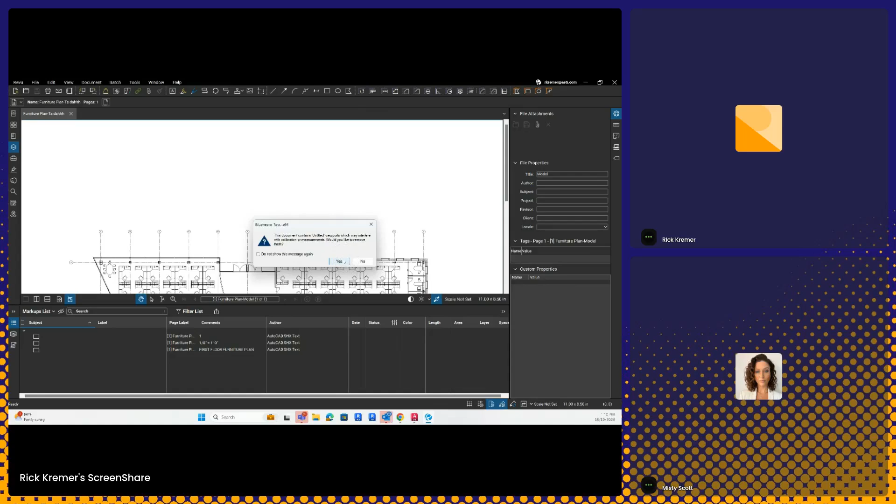So there's a couple things about troubleshooting with AutoCAD drawings. First of all, it has viewports it doesn't know what to do with, so go ahead and hit yes to get rid of those viewports. So let's focus on layers.

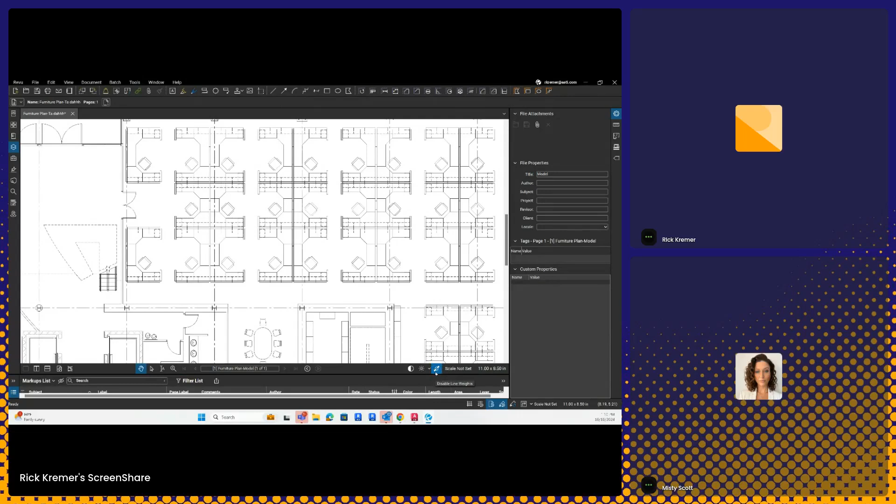First and foremost, Bluebeam will display the plotted line weights. In the display properties, we can select this off, and you can see what it looks like using that CTB from AutoCAD. I always work with line weights off, and that's how most people work in AutoCAD as well as Revit. I'll turn on disable line weights—by the way, anything that's blue means it's enabled. What I mean by layers is if we go over here to layers on the left-hand side, look at this—you see all the layers? This is something that comes out of AutoCAD.

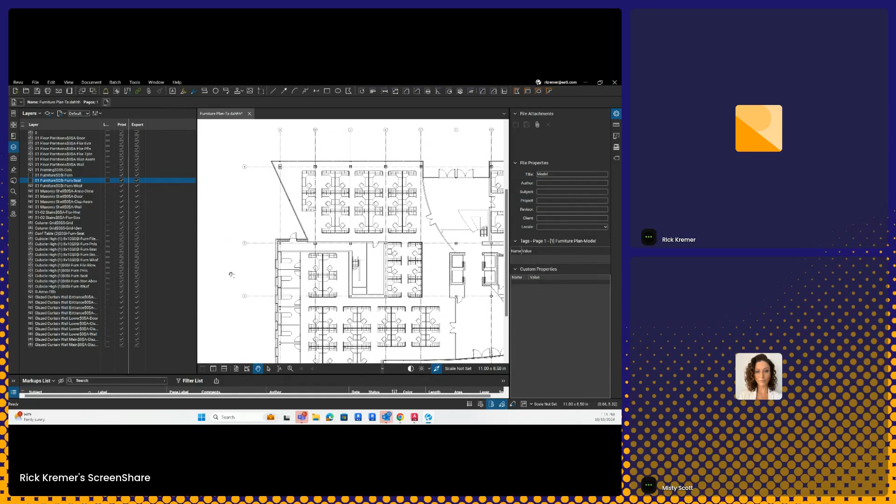If you use the Bluebeam Revu add-in, it puts it all on one layer, which is nothing. Here, I can start to go through and turn off my furniture. You see things turning off in these cubicles? It is pretty darn cool. So I can start to turn off the floor partitions, turn off these furnitures, these cubicles right here, and little by little clean up that PDF the way that I need it to be. How cool is that, right?

When we take a look at Bluebeam again, this is the information I really want to look at, the core and shell. So now at this point, there's nothing I need to do. I can minimize this and basically begin to work.

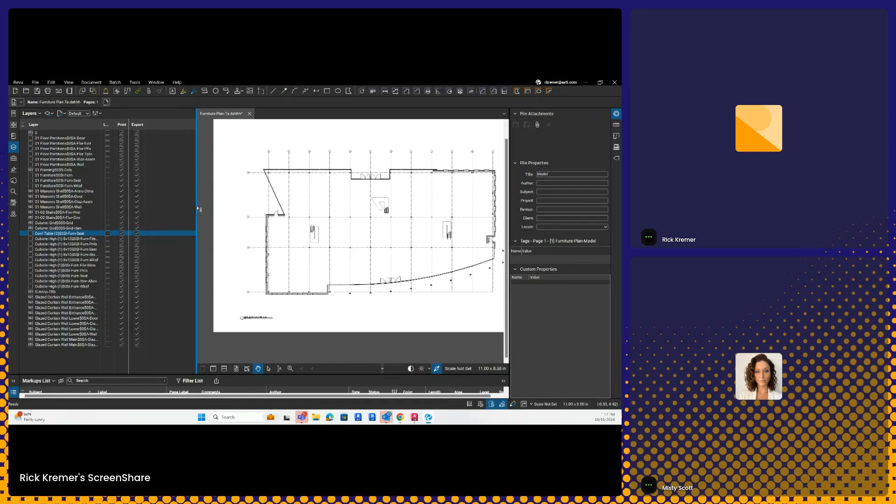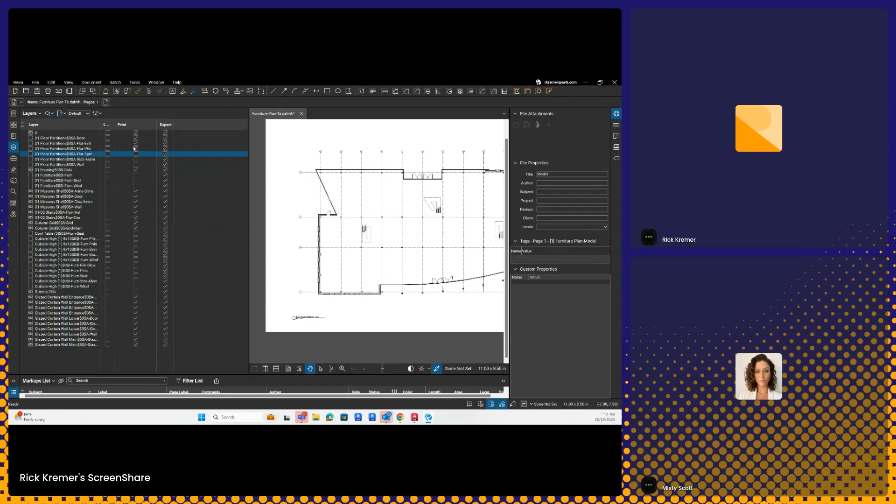The other thing we can do, which is really helpful, is just in case they are turned on here in layer information, is things that can be printed, right? So all of these, I don't want them to print at any point in the future. I'm going to select them all and uncheck these right here so that they do not print. Boom, boom, boom, boom, boom. Right, and the same thing over here on these guys. So this is just like in AutoCAD where we have things that plot and don't plot. So that's really one of the major takeaways, using layers.

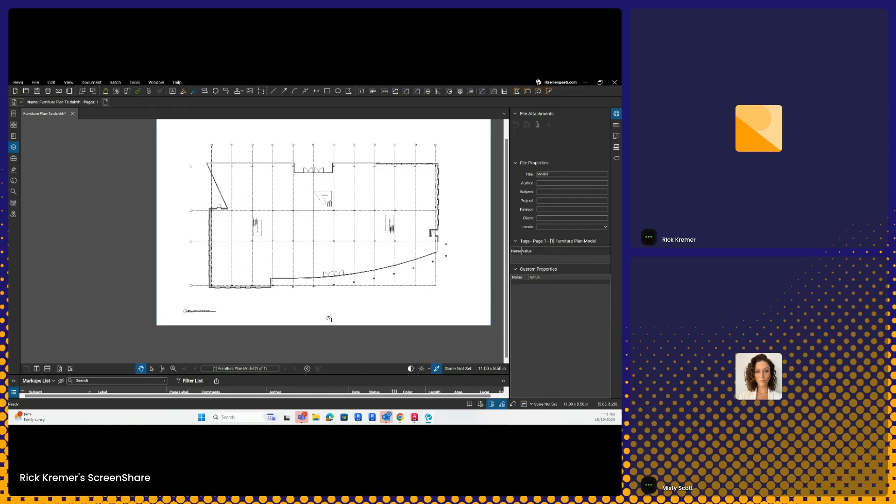Now let's say for argument's sake you're like, Rick, we don't have anything in layers. It comes from Revit, right? And in Revit we don't have layers because Revit rocks. When we get a drawing in as a PDF from a consultant using, let's say, a third-party application to print, or it comes from that AutoCAD application, a lot of times when you first get a drawing you're going to get a bunch of layers over here on the markups list. If you don't see the markups list, select this to turn it on. This is a little hamburger icon to show layers. But let's take a look at this real quick.

So folks, when you first get a drawing, open up your markups list. If you have a bunch of SHX fonts...

Over here we have all these SHX fonts. To get rid of them, easy peasy, folks. Over here, go to Document and Flatten. Again, why do we do this? It's because as we start to develop our markups, we don't need these in the way. And quite frankly, what they end up doing is, let's just say, they make the file a little bit more corruptible, right? It can start to give you issues when it has information that Bluebeam doesn't know what to do with. So how do we get rid of it?

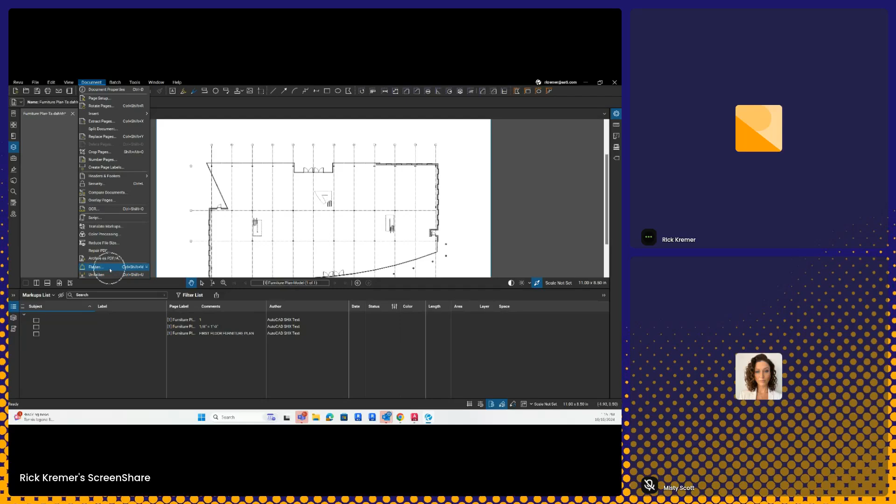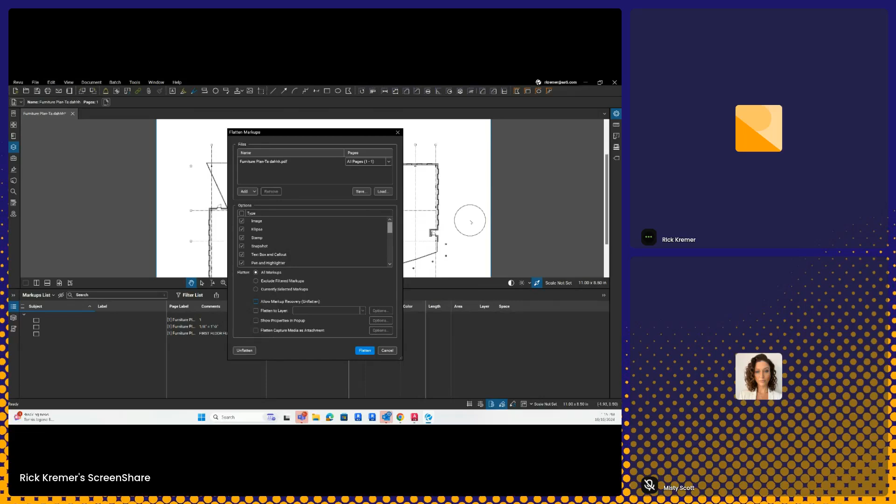You can't delete it, but we can flatten it. Check it out right over here under Document, select Flatten. What you want to do is select everything here in the options dialog box, okay, and uncheck allow markup. This feature allows you to flatten a document and then later unflatten it if you want. That's a whole other discussion, but over here what I want to do is get rid of it altogether, so I'm going to flatten it. It basically squishes it into the white piece of paper here. So I'm going to check this, clear it, click flatten, boom. Guess what? My markups list is now clear and ready to roll. How cool is that? Whoop, whoop.

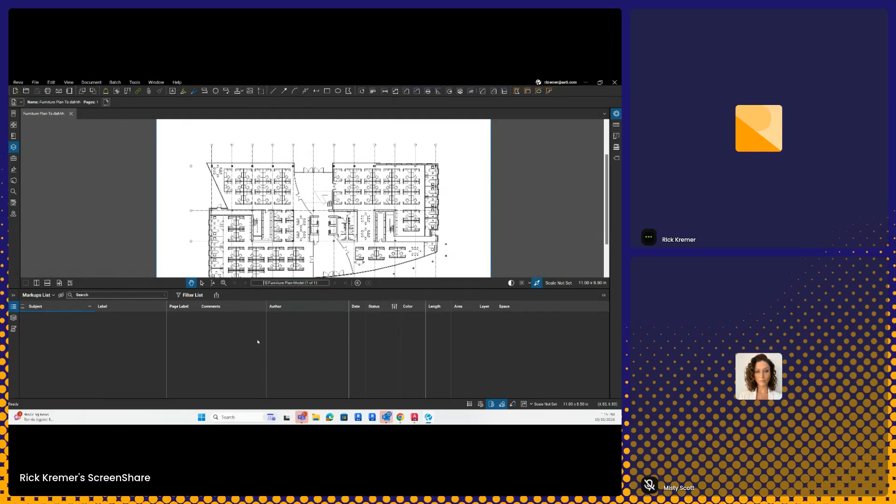So now go ahead and save it. So now I've saved that file. My layers are still intact, right? Flatten does not get rid of layers, it just puts the information in the markups and embeds it inside. And that's exactly what I want. So now the next step to get my PDF ready for consumption is find out what the scale is, right? So over here, this is at 1/8 of an inch. Well, remember, I did a plot to scale, pretty much zoom to fit.

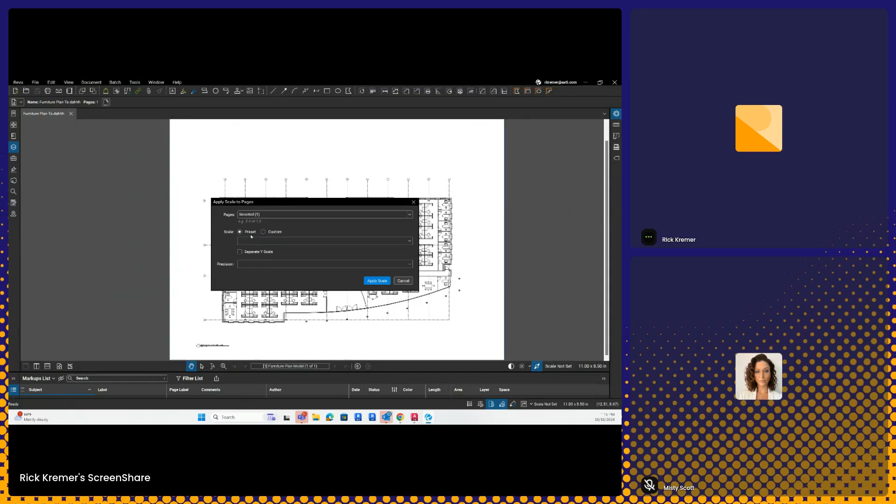So this might not be at 1/8 of an inch. A lot of people will set the scale according to this, but let's see what happens. If I'm doing linear or area calculations, it's imperative to have the correct scale. A lot of people just get lazy and say, yeah, it says 1/8, I'm going to set the scale at 1/8 and round it up to a full inch. And I think I'm off to the races and I'm good to go, right?

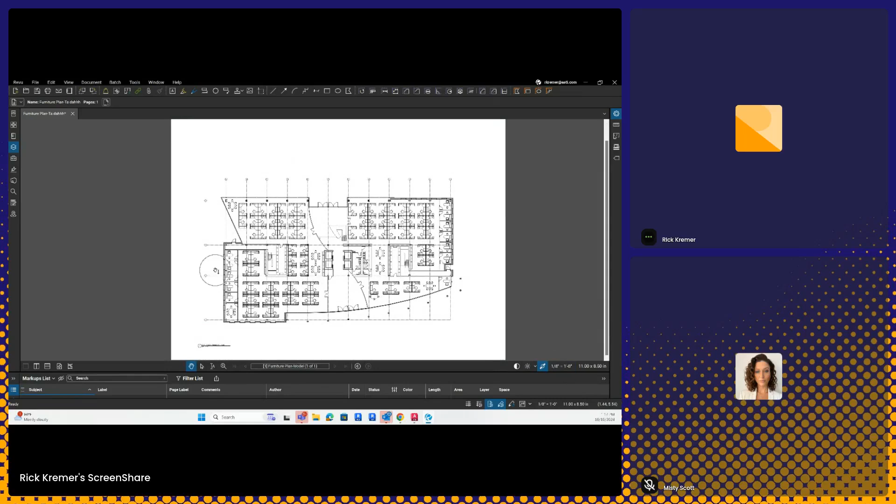But did the person who sent this to me actually print it to scale? This says it's at 1/8. Well, let's do a quick dimension check. Unfortunately, there's no dimensions here. Let's see if there's a dimension layer. Wah, wah, wah. There's not.

So what do we do? Let's take a look at this drawing more carefully. If we look at a typical door, all your doors are always going to be 3 feet. For the most part, all typical doors are 3-foot openings. So let's do a quick test.

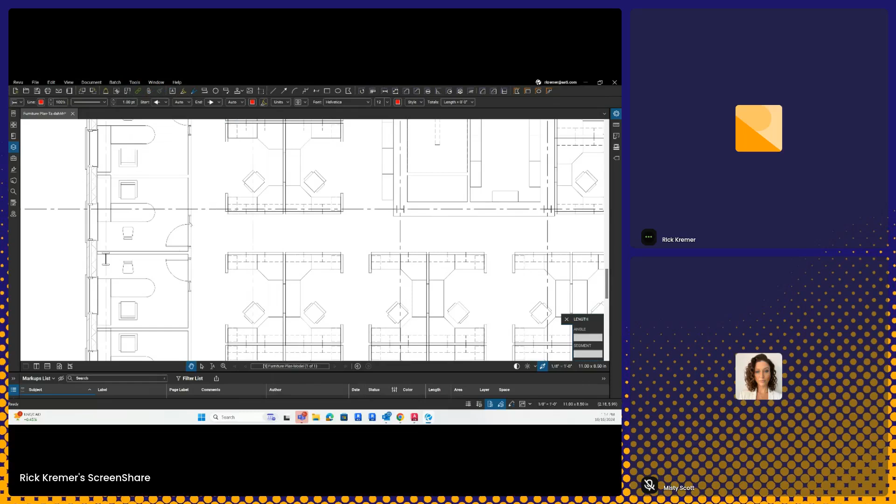I'm going to go to Tools, Measure, Length. If this is the first time you're doing this, measure length is just like dim linear in AutoCAD or a regular dimension in Revit. This is point A to point B. So I'm going to do length, and come over here, zoom in on this door, and go from here to here. Oh folks, look at that. 10 inches. You know it's not 10 inches, it's 3 feet.

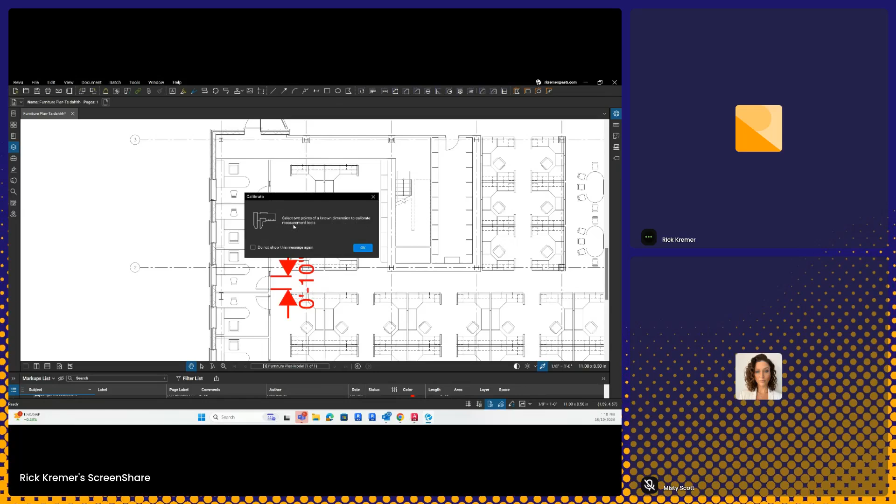So what do we do? We fix it. Let's go back to Tools, Measure, and Set the Scale. Clearly it's not 1/8 inch, so what I do all the time, no matter what drawing I get, is custom scale and calibrate. This gives me an opportunity to pick 2 points on my PDF that represent the distance. I'll click calibrate, and it gives me this dialog box. It says pick 2 points of a known dimension to calibrate the measurement of this drawing, and you can set calibration for 1 sheet or multiple sheets at one time. This just happens to be 1 sheet.

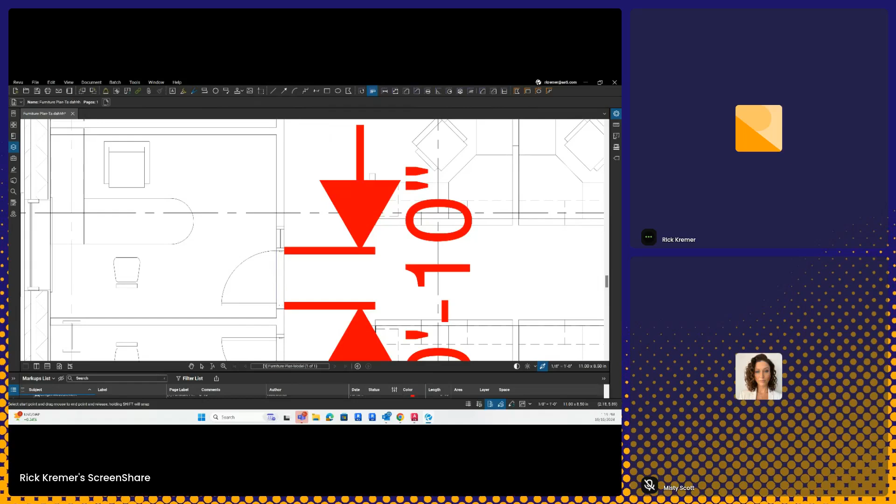I'm going to select OK, and automatically it's going to ask what area we're dimensioning. I'm going to pick that same door, go from here—and by the way, another quick tip, hold Shift and it goes straight—all the way to this point. That highlighted area represents the dimension area. That's 3 feet. Precision again, round it up to a full inch, apply scale, and now we're cooking with gas. 3 feet. Let's do another dimension real quick.

I'm going to go to Tools, Measure, Length. Let's get another doorway right over here, from here to here. 3 feet. We're good. So now when I start doing area calculations, everything is going to be accurate. So if I do an area calculation and say, what's the area of this one right here? It's 282 square feet.

By the way, if this is too big, just change the scale. Over here, I'm going to change it much smaller, maybe down to 6 points so it's nice and small. Give it a nice fill color. What's the problem with this? You can't see through it. No worries—over here in the top properties toolbar, change it to highlight. Now it becomes highlightable. Pretty cool. I'm going to make that even smaller. That's really, really tiny.

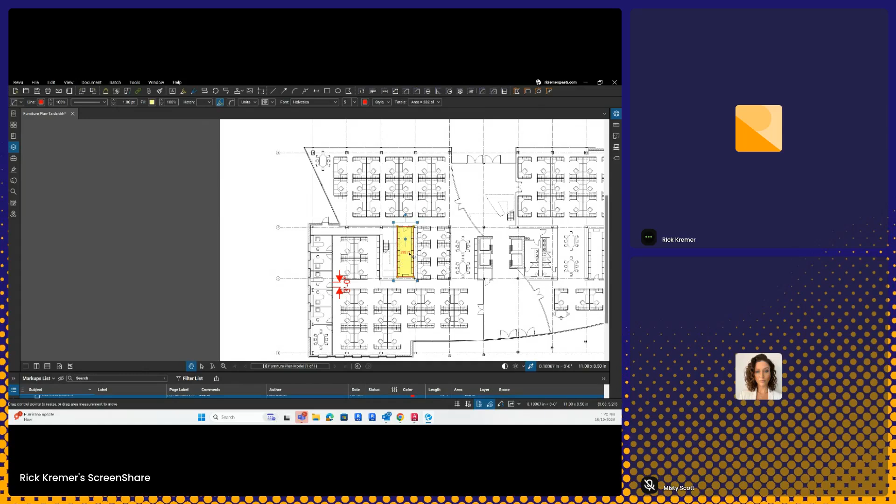So that, in essence, is what we need to do. And if I want this to be the default—I haven't even talked about creating specific area measurements, subject related—but if I want this to be the standard I'm going to use, I select my markup, right click, and set as default. This is kind of an easy way to set up your markups for default use, like always wanting them to come in yellow. Give it a new name, change the properties as you like, and set as default.

Now, when I go over here to Tools, Measure Area, I want to measure this right here. It's 863 square feet. And there's my total square footage so far. If I'm looking at, say, carpet for that particular one, I can start to go through and change this over here to CPT1. And this one right here is also CPT1.

We want this to be a default, setting up my PDF for success. I'm going to start to utilize my tool chest. My tool chest has all these different tools. I have this area here called My Tools, which is really nice, and I can apply these over here to My Tools. Add to tool chest, My Tools, and there they are. Here's a nice little shortcut, by the way.

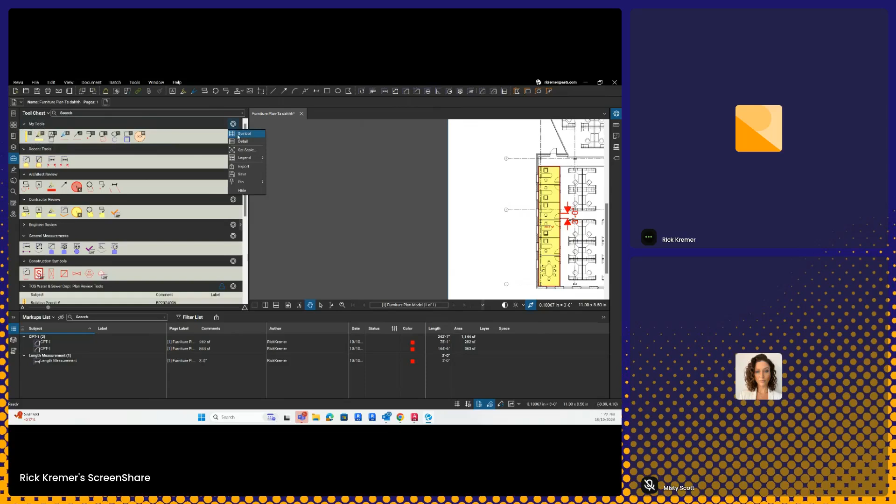You'll notice all the numbers that are here, 1 through 10, it'll go 11, 12, etc. Drag this to the front. These are your shortcut keys if you want to create new things based on your My Tools. Change this to detail, CPT1.

If I want to start to add more area carpeting, watch this. Over here, all I have to do is use my number 1 on my keyboard. Hit escape, hit the number 1, and now it's ready to go. You'll notice, wait a minute, it's the wrong size. Double click on it to go into properties mode instead of drawing mode, and properties gives you new properties every time it's created. I'll hit 1 again, and now it's ready to go.

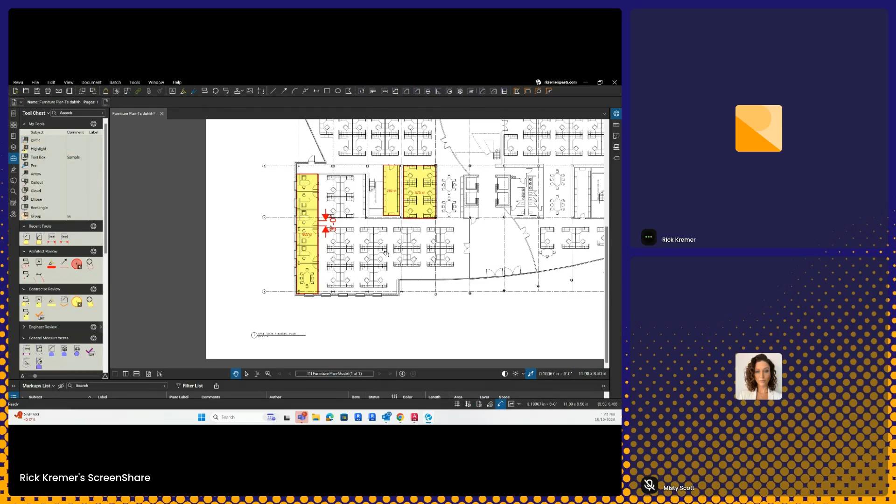If I have multiple areas over here, what I'm going to do is use my reuse tools. This is in the display properties. Turn that on. Watch, I'm going to hit the number 1, and as soon as I'm finished, boom, boom, it's ready for the next area. I can easily start to go through and do all my different areas. If I have multiple areas like this, I'll just take them and kind of blend them in like that. Pretty cool, and that is all my shortcuts.

By the way, I don't know if you've seen this already, folks. If you are on Revu 21, there's a new version called 21.3 that came out. That's a free update. If you go to help, check for updates. There's some really cool things.

Can I show you something that's really cool? It's called dark mode. This new icon over here called dark mode, when I click on it, it changes my drawing to anything that I want. In this case, to a black inverted drawing. So if you're staring at your monitor for 8 to 10 hours a day and really don't like this white background, dark mode gives you the opportunity to temporarily change the color background of your PDF.

This is over here, controlled. The color is over here, but you'll see it says dark mode. This is different. This dark theme is the theme for the application, but the dark mode itself is controlled inside here where we can set up the different kind of colors. Where is that? They just created that somewhere new. Interface. This is a brand new feature. Anyway, I'll have to come back to it.

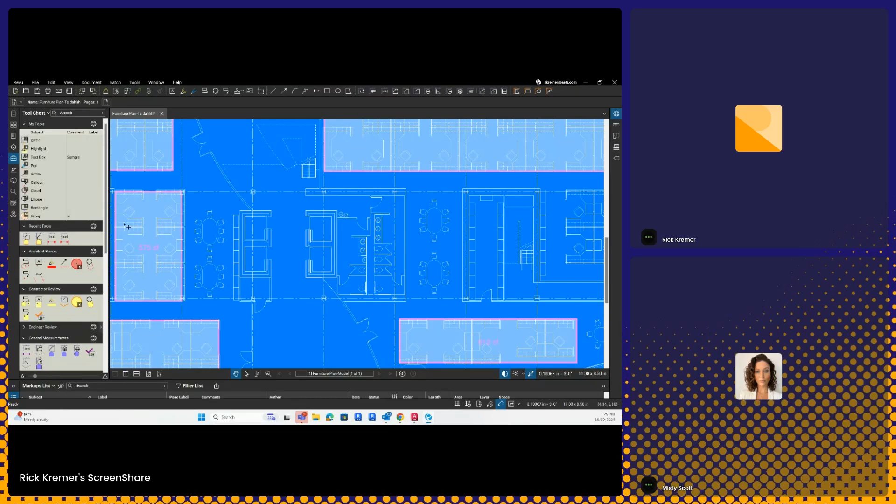Very good. All right, what questions you got there for me? Jarrett said, is the layers to PDF tools available for MicroStation?

That I don't know. I don't speak MicroStation. I'm sorry, Autodesk all day long. MicroStation, you would have to look in the properties of your PDF export and see if there's something similar to include layer information, because I don't know MicroStation. Sorry. Okay, so let's see.

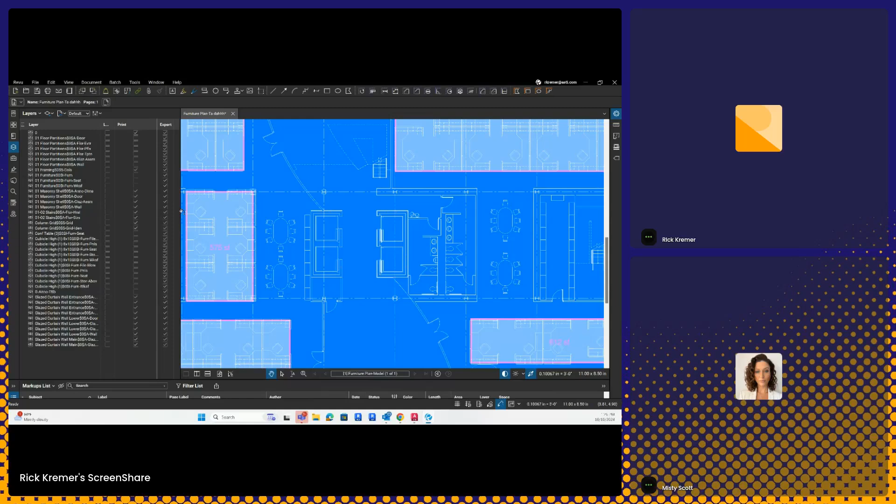Oh, I got an idea though for them. You can export out to DWG from MicroStation. So then from there, if you export out as a DWG, open it up in AutoCAD, and then print it as a PDF, from MicroStation format to DWG, then DWG to PDF. Maybe that might be a workflow if you have AutoCAD installed.

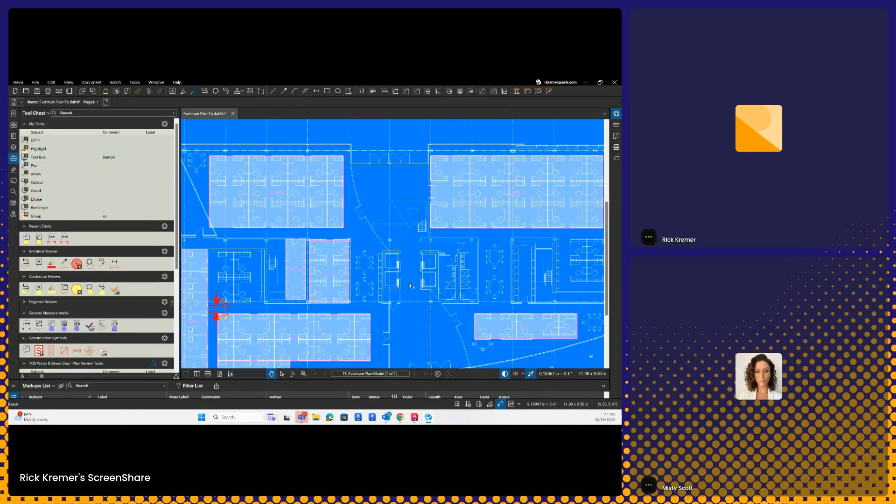All right, and Darren was talking about, he's a Bluebeam Revu user, and he didn't know you could use keystrokes for his tools. And he said in dark mode, black lines become white. What color do gray lines become? Oh, let's find out. You know what, I don't know. Let's give it a shot.

Tell you what, I'm going to come over here and do a gray line, and I'm going to make it nice and thick. So here we go. All right, here goes, drum roll. They become gray. They stay gray. How's that? Gray stays gray.

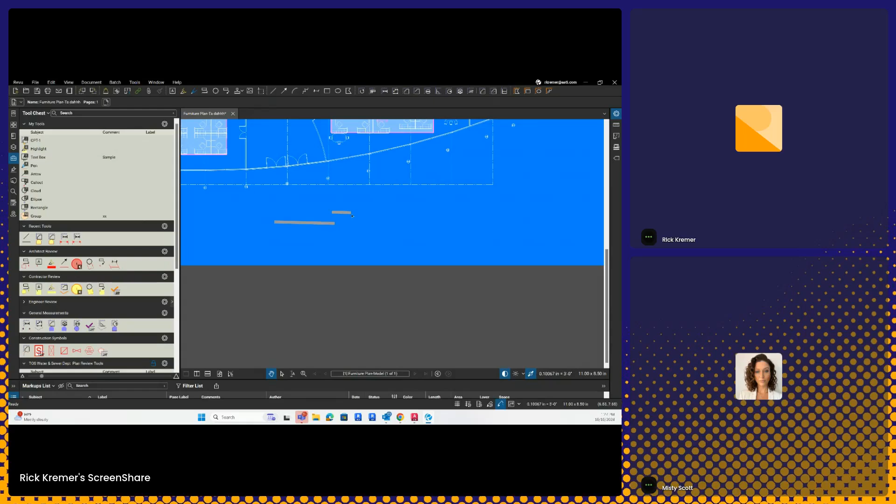What's really nice about the My Tools area is that if I have something I'm going to be using over and over again, I can use it. If you've seen any of my webinars, you know I love my tool chest, I love my tool sets, I love going through and creating custom tools. You'll notice over here, these are the built-in tools that come in Bluebeam Revu. If I say I really want to use this over and over again but there's no shortcut, I just grab it, drag it into My Tools, and now I have a copy of that here under contractor.

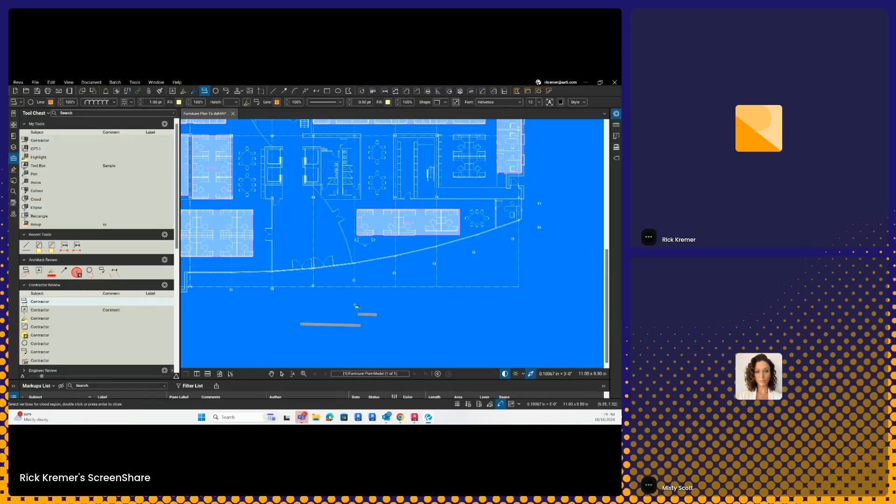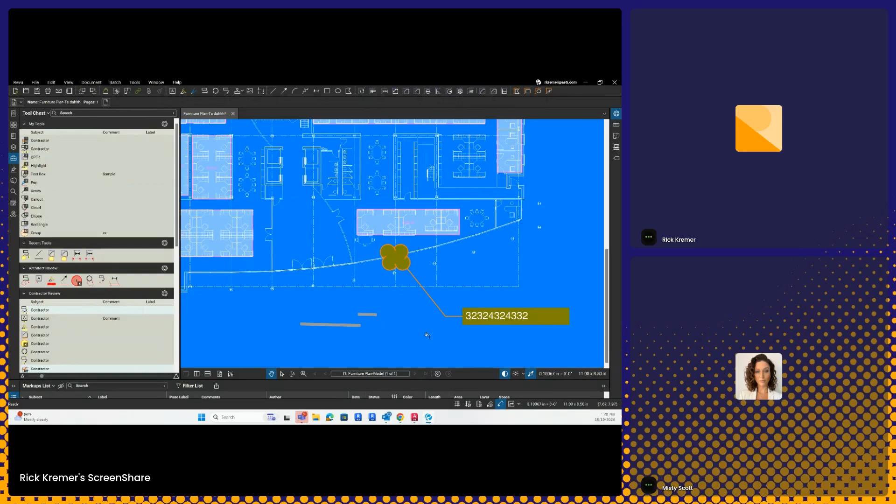From here, I can hit escape, hit 1, and now I have those tools. That's an easy way of saying, hey, I need to go through this all the time. Whatever it is I'm about to do, if I'm doing count, I can come over here, drag that up to the top. Then as I'm working on a drawing, I can quickly go, hey, I need to do a count, just hit the number 1, and now I can easily go through and do that. That saves me so much time. I change it up, do something different. So My Tools is a great area for that.

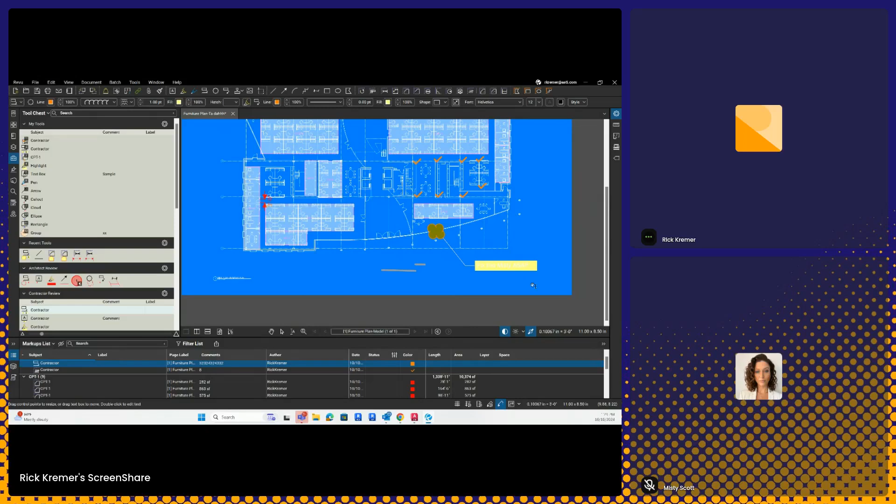Here's another one, this is a great new thing in Revu 21.3 that just came out. Do you guys know about statuses? Let's say this right here was a real red line - fix this, Misty, ASAP. I'm going to turn off blue line over here, and Misty gets this and she fixes it. Well, a lot of people forget about using statuses. If they're sending a red line to someone, they can click inside here and change the acceptance.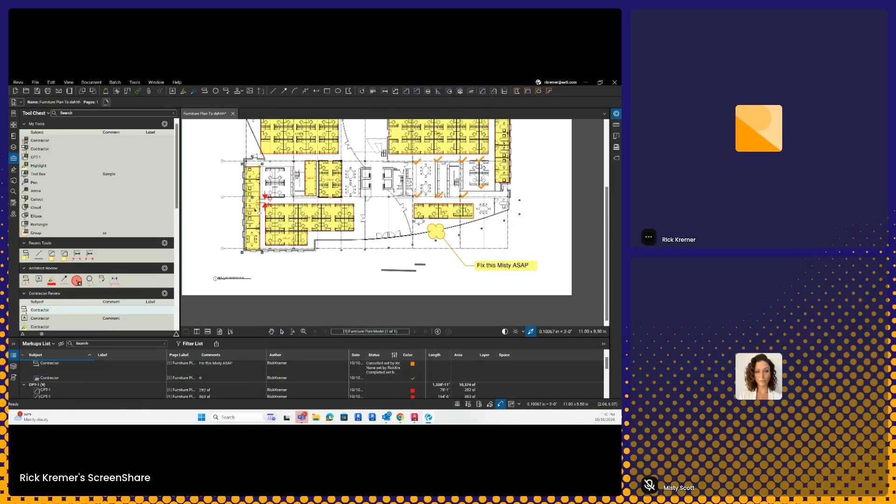But now included are keyboard shortcuts. If you come from the keyboard shortcut community and love keyboard shortcuts, this is something nice and new. Now I can do shift statuses, 1, 2, 3, 4, 5, and these are customizable by the way. So I select this, I hit shift 3, boom, it's canceled. I select it again, I do shift 5, and it's set to none. Let's see, it's been completed, shift 4. So I select it and I just do shift 4, boom, done, set to complete. I do this one, shift 4, done, completed. It's really great, I don't have to click on it and double click inside here.

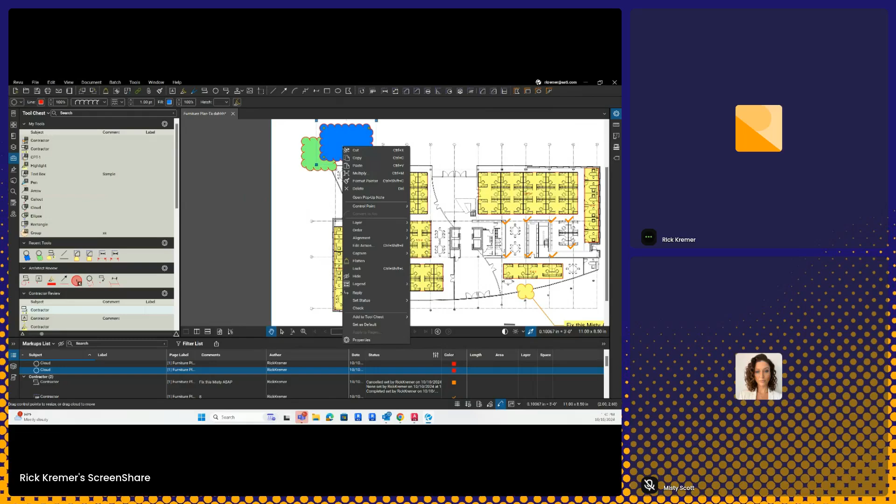That's really nice. Another great new feature is if you have a lot of clouds or markups on top of each other. So over here, I'm going to fill this with green, and I'm going to fill this one with a different color, blue. If I want to go through and see this information, I can right click on it - this is a new feature, hide. I can hide particular markups. I can select this markup over here and hide that one as well. My markups are temporarily hidden. If I want to see them, I hover over this and it shows me all my markups. So if you have a lot of markups on top of markups, you can easily go through and temporarily hide them. And if I want to reveal them all, just double click and now they are revealed.

So dark mode, hiding, and shortcuts for status - I think those are my top 3 favorite new features of 21.3.

What else? Yeah, you know what, I'm loving this open discussion in the chat. They're totally vibing and giving each other information. So I love it. I did want to highlight - let's see, I want to go up to some of these. Let me come back to it.

Tool chest search - oh, tool chest search, yeah. Hey folks, check this out. Thanks Nate, I now just opened up the chat. So in the tool chest, this is a nice new feature over here. If you have a bunch of tools, now you can search them. So I am looking for everything with the contractor, I can just start typing this in and it'll pull in just the tools associated with contractor. I'm like, nope, I want the tools with architect, and it just gives me all my tools for the architect. This is awesome. Civil - I don't have any civil tools, but that is awesome.

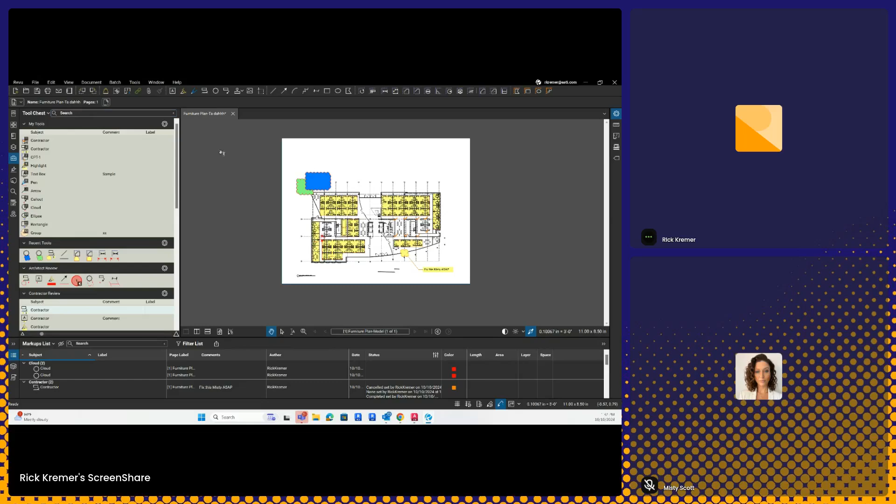How to do count with check marks again - Patrick, you've got it, you want to see? I'll show you. All right, I want to count something over here. I can count it manually. I'm going to go over here - that markup tool over here was a count measurement tool that I have in my tool chest, but where it's located is here under tools, markup - no, measure.

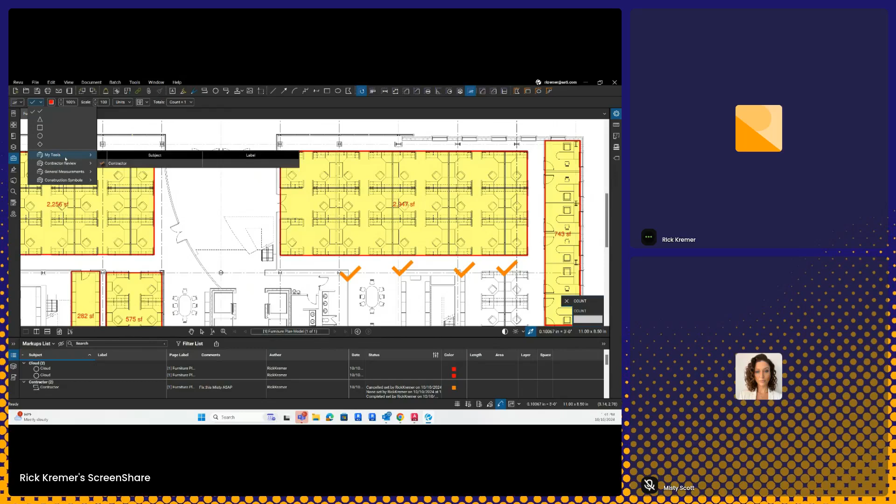With the Measure Count tool, when you apply that in the top properties bar, you'll see default check marks. You can set up and use any of the out-of-the-box symbols or create your own, and you'll see them listed down below. You might have different tools, and you can go through and check all the ones you want.

When you're done, hit escape, select it, and here it is. If I want to give this a unique label, like '1 hour rated doors', and then realize I need to pick up doors located elsewhere, I'll select it, right click, and resume the count, then continue picking up doors located here and here.

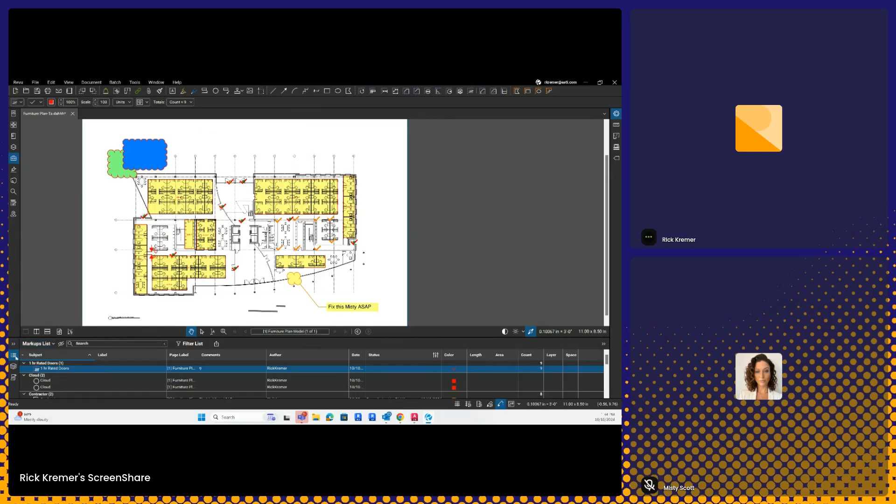How many doors do I have over here? Turn on the markups list, go to columns, turn on count.

I have 9 doors. The question usually comes up when I'm going to send this to someone who doesn't have Bluebeam Revu - they don't see our cool markups. So I'll create a legend by selecting one of my count icons, right click on it, go to legend, create new legend, and boom - there it is.

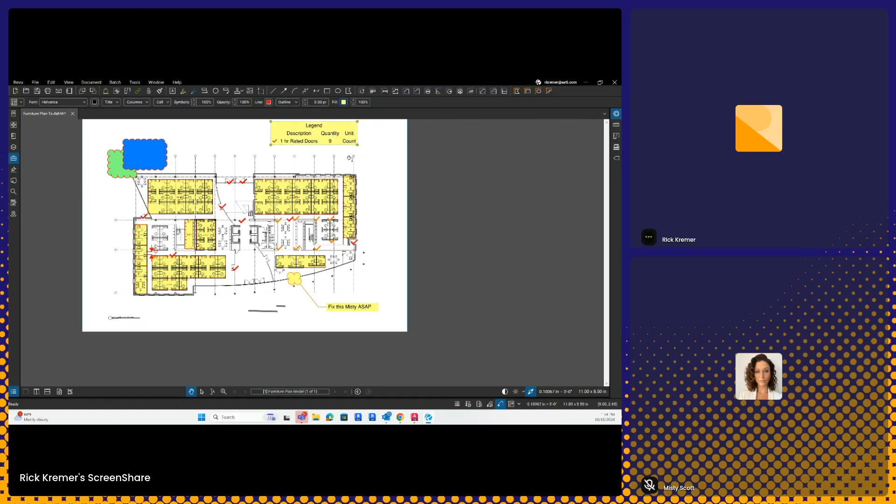I like giving it a little extra. There it is - make it smaller. And this is live linked.

So if I go through and right click, add more doors, resume count - there's some doors here and over here - now it updates to 11.

Cool, all right - merge counts. Yep. Resume count is great along with merge counts. David, 5 points for that one. Yes, merging counts is great.

If you copy count from one PDF to another and want to erase a bunch of counts, can you select a range, or is it just right click and remove count one at a time? If you count from one page to the next, yes, you have to go through and delete one at a time. Maybe someone else has a different way of doing it - I don't know of a different way of selecting multiple of them.

Keith asks: can you resume visual search? I found visual search does not find all the items. That's a great question - let me open up another file.

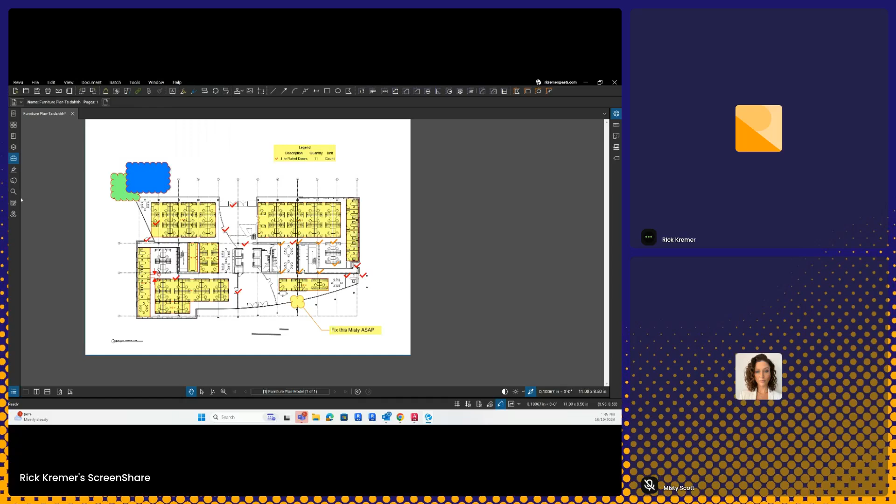I like this one right here under tutorials, and I'm going to do a quantity takeoff. By the way, on the other screen are quick little tutorials that are 3 minutes long - there's a preview video, but I like it because it has this data sample. Let's take a look at that.

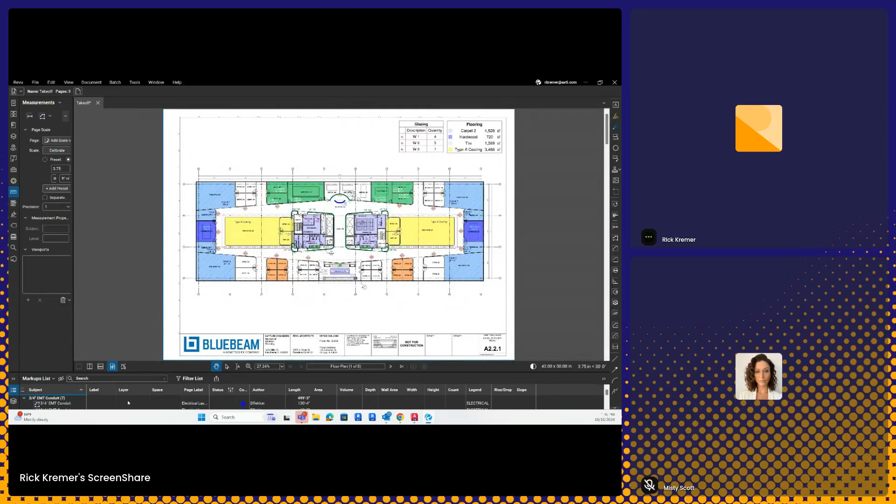I'm going to close this, save what I'm working on. Over here, let's get rid of all of the markups that are here, if I'm looking for an item.

You saw how I did a count manually, but if I wanted to do a different count - let's say I'm a mechanical contractor - and there's my mechanical, I want to find these diffusers, or an L2 or L1, whatever it is.

You can do what's called a visual search. This visual search, by the way, is available in Bluebeam Complete and the middle tier, Core, not Basics. So you have what's called a text search, like L1, RF1, L2. But if it doesn't have text, you can do what's called a graphic search or a visual search.

Define the area you want to look for, and Bluebeam says, 'I want to look for this item right here.' My hint is usually around here - you're not going to hit as many varying types of diffusers since this one is sandwiched between these two lights. So what I tend to do is go all the way down and then up one - this gives more flexibility and it'll find more things, like this guy, or this one with varying degrees of what it looks like.

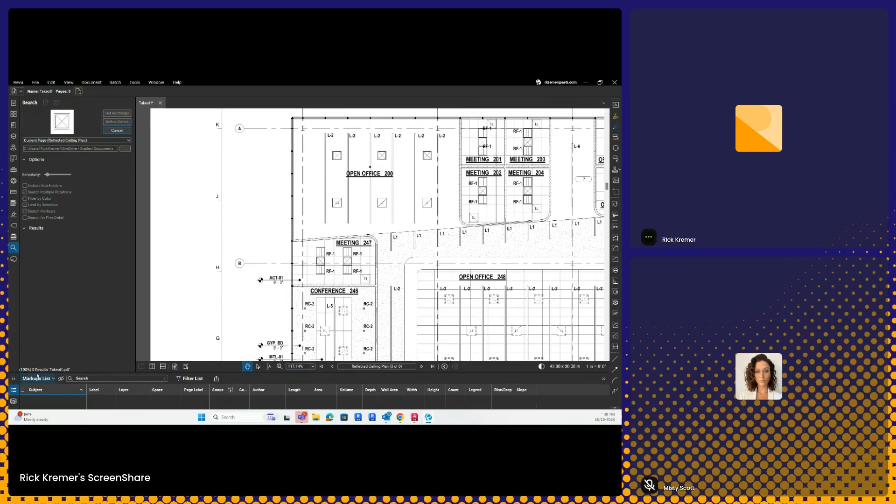And there are my search results. When I start to take a look, this is a preview. It might be kind of hard to see what these look like on my screen or on your screen, but this gives you an idea of everything that's looking for.

Can you show how creating forms? Oh, if I have time, I will do forms, Rick. Folks, by the way, these are great questions.

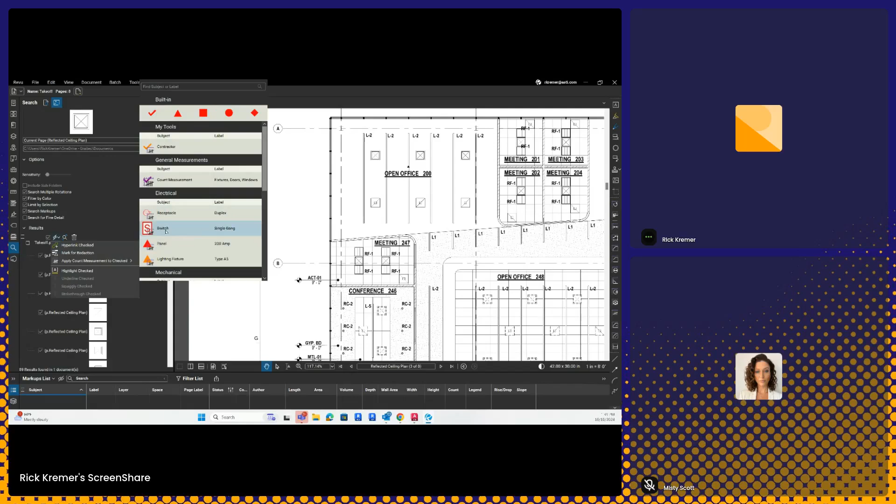All right, so over here, let's go back. I'm going to apply a check mark and select them all and apply a count. Applying a count has the built-in tools over here at the very top where I can select any one I want, or I can use one of the ones I've defined. By the way, you can define the different type of graphic forms that you're using for different things, so you can easily create whatever you want. Here's one for smoke detectors, here's one for CCTV. If I wanted to keep it generic, I can use these.

And I'm going to show you something. I'm going to use this red one. Like, holy moly, Rick, I can't see what's underneath it. By the way, these are already in my selection. I'm going to go ahead and clear that result out. And then I'll say like, hey, I can't see what this is. By the way, that generic count says generic count measurement. Over here is supply vents, but you can't see through them.

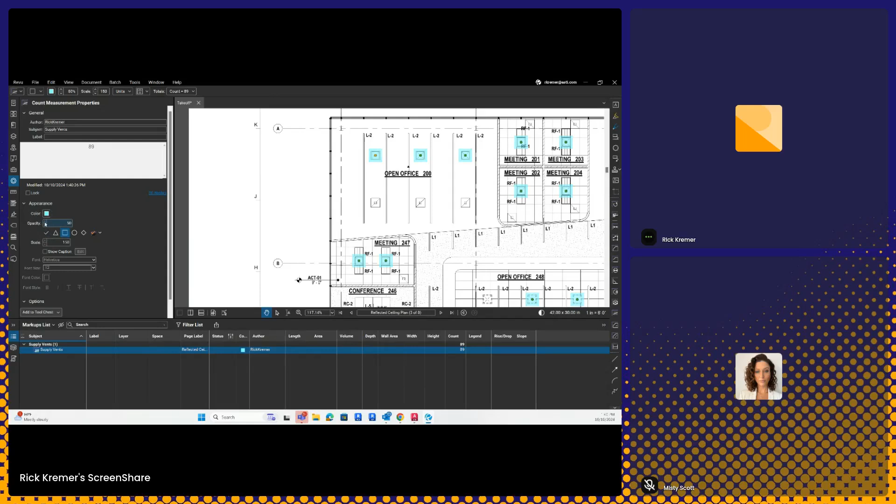Select it, right click, go to properties. And I know I'm doing this pretty quickly. Over here, change its color to something you want. And then I'm going to scale this up. Still can't see through it. So what I'm going to do is change its opacity. Usually 60 or 50% is my happy medium. And now I can zoom out and easily see all of them.

To resume the count, it missed a couple. I'll select it, right click, resume count. Boom, this gets 90% of the way there. I'll be honest with you folks, it really is hit or miss - I shouldn't say hit or miss, I take that back. It gets you 90% of the way there, so you want to make sure to go through it manually.

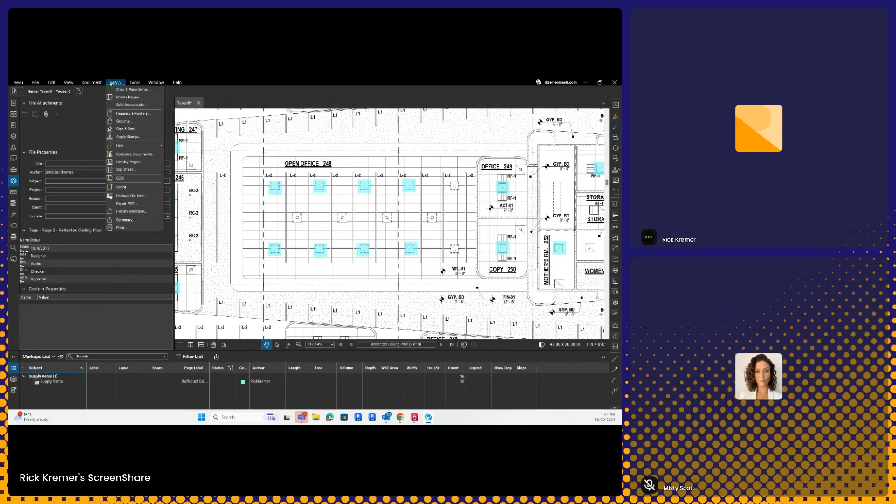I have noticed that if you have line weights turned off over here, it has a lower chance of hitting and catching everything. With thicker lines, it does a much better job. Now, you might not have seen much of a difference, but trust me, if you turn this on so it has nice thick line weights, Revu has an easier time of finding more of these.

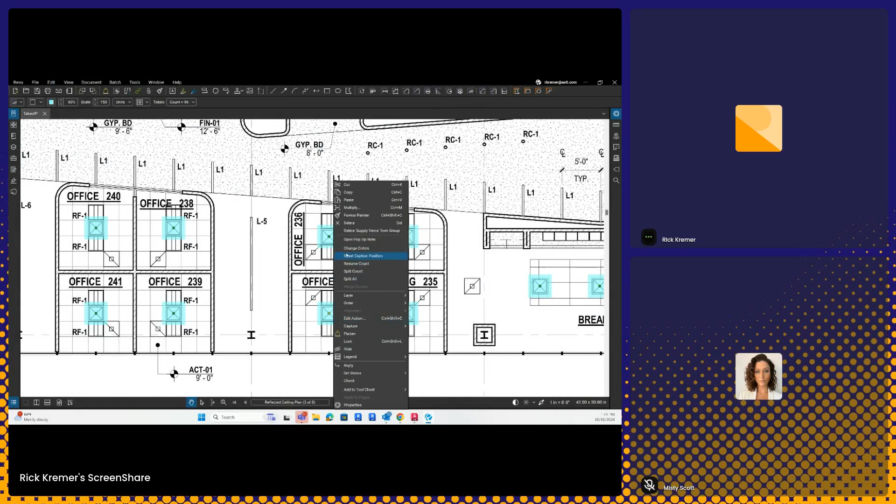And again, just like before, I can select one of those and go over here and create new legend. Boom. And then I can come back to it, right? I can save it and then let's go back to it and resume the count. And take a look for whatever it is. Boom, there's one right there, and it updates that information.

All right, let's see what other questions. Visual search is a good way to check you haven't missed something in your manual takeoff. Yes, David. Oh, awesome. How do we add more count icons that were on your list? Patrick, and I do apologize, I'm kind of looking at the last ones here on the call.

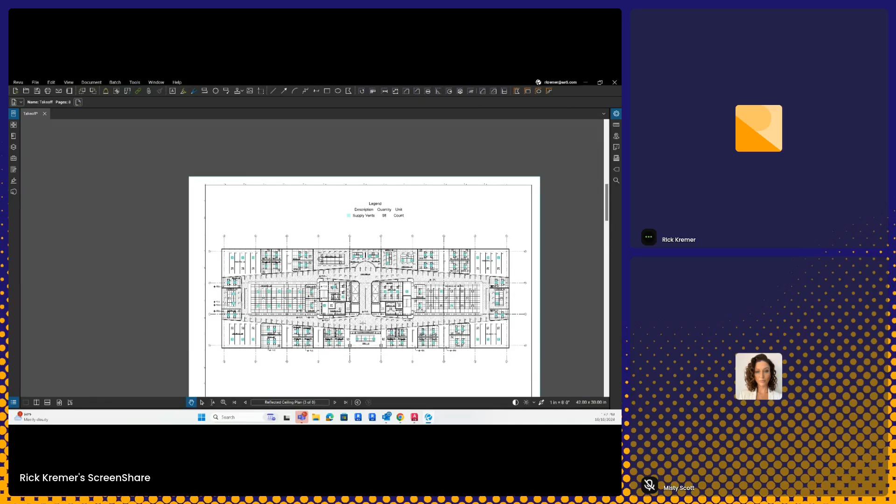If I want to add a custom count, how are we doing on time? 1:42, I think we got time.

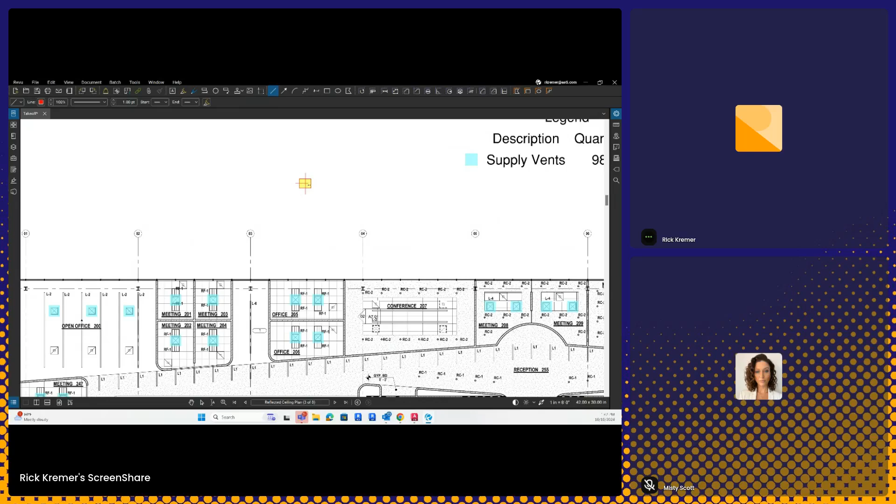Let's say I want to have a custom icon. I'm just going to create something crazy. I'm going to go over here and draw something, and I'm going to change it over here and change its color. By the way, you're not limited to just objects. I can take something and draw it here. And so let's say this is the object - I'm going to make a little circle.

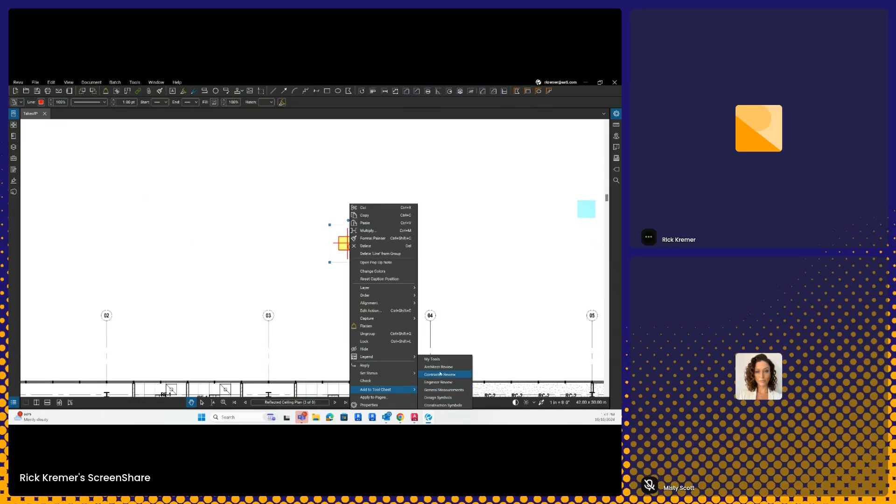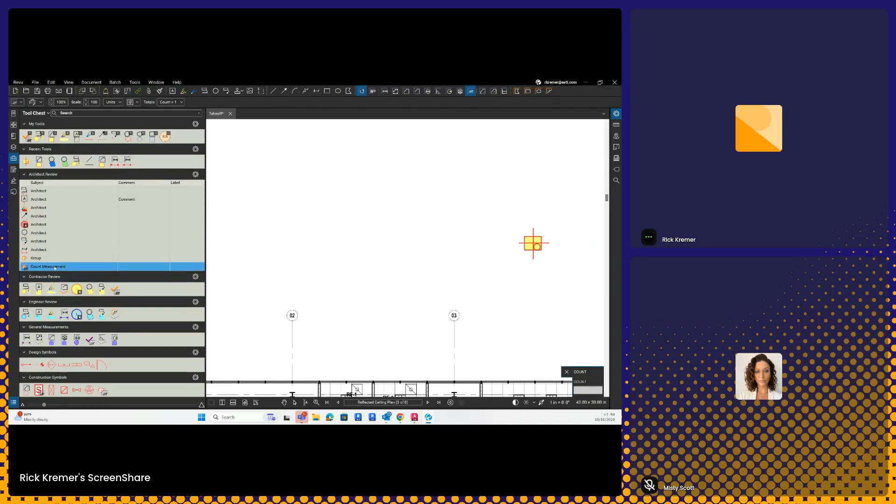Boom, right there. I'm going to group this object by right-clicking and group it. Take the object, and I need to add it to a tool chest. I'm going to go over here and add it to architect review. This is a little bit of a lengthy process, but what you need to do is define the group first. Then I'm going to right-click on it and tell it to create a count. This is now a count measurement, but you'll notice it's generically called count measurement. Select it, while it's highlighted, go to its properties and change the subject to exactly what it is. And so this is outlets.

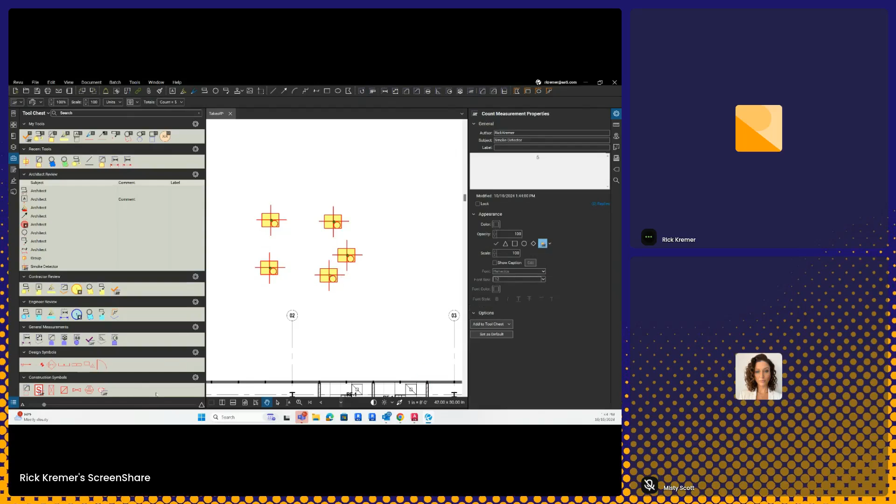Maybe this is smoke detectors. Smoke detector, right? Click in the next one for this to stick. And now you'll see this is updated. So when I put in this object right here, this is now ready for it. Smoke detectors, and there it is. And I'm not limited to just this.

You want to see something fun? I'm going to go over here and open the Google, as my mom calls it, the Googly. And I'm going to just look for icons, right? I'm just going to find something. I want this to be my thing, whatever it is, right? Get this, I'm going to use Windows. Ready for this? Snipping tool. You can see, guys, I love geeking out over this. I'm going to use snipping tool, and I'm going to snip it. This right here, boom, it's copied to my clipboard.

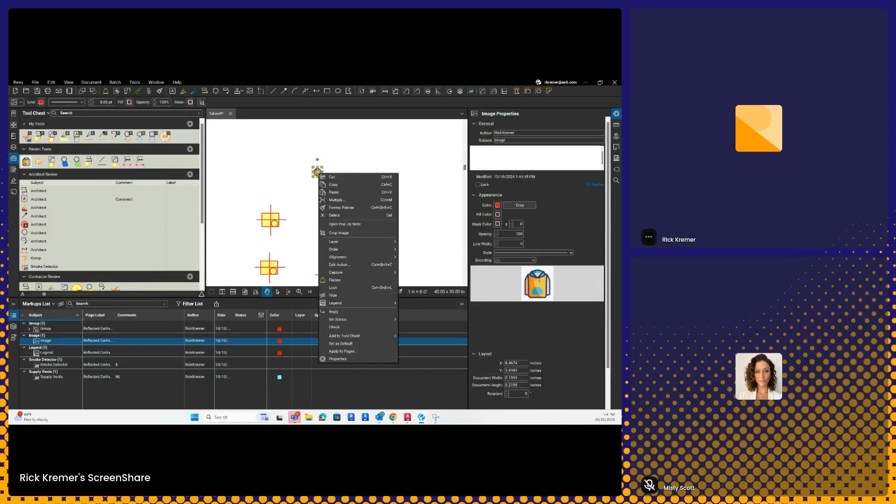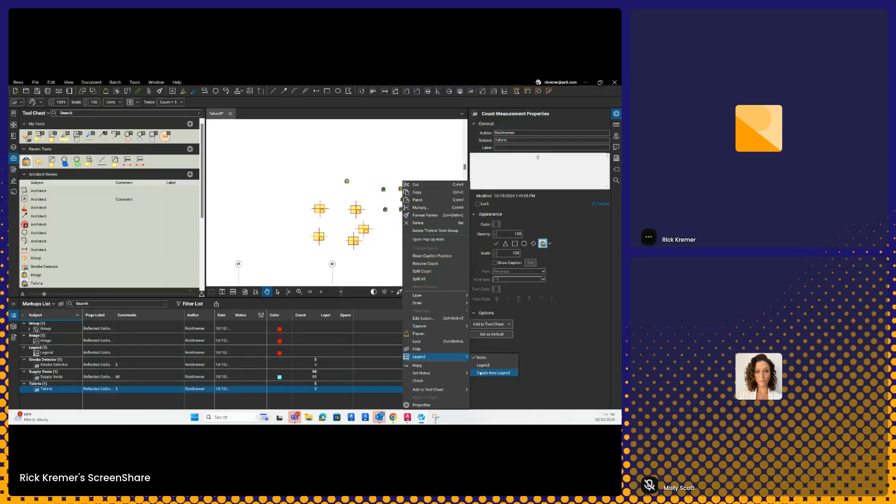I'm going to go to Revu, Control V. Guess what? This now is going to be an icon. I'm going to add that to my architect reviews. Right click, create count, and t-shirts. I'm going to select this, and here's how many t-shirts I have. I got 5 t-shirts, and put count on. And again, just like before, I want to create a legend of this. There it is, t-shirts. How cool is that?

Misty, did you know that you could take screenshots of pretty much anything out there on the World Wide Web using Windows? And now I have a custom little icon. That's pretty nifty. I do that on a daily basis. So yes. It's awesome. Love it, love it.

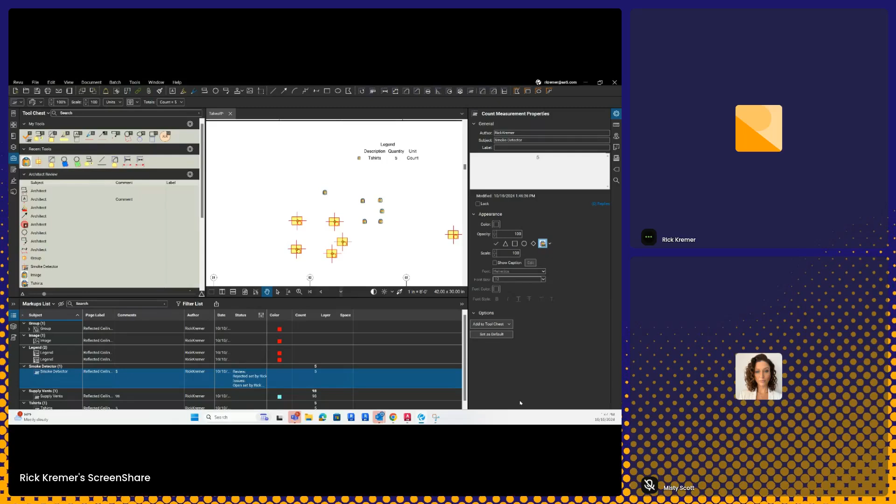Robert, have you tried, or are you tried, I would imagine you meant, have you tried AutoCAD help coming up when you accidentally hit F1? Use the CUI to change F1 to be treated as escape. You know what, it's funny. You know what, let's see what happens. I'm going to come over here on my laptop. Hello? Can you hear me now? Yeah.

Is there ability, this is going to be a challenge, can you count shapes, like say a polygon or a rectangle, to sketch to scale? Because I use them for rooms, like on a plan. Can you count those?

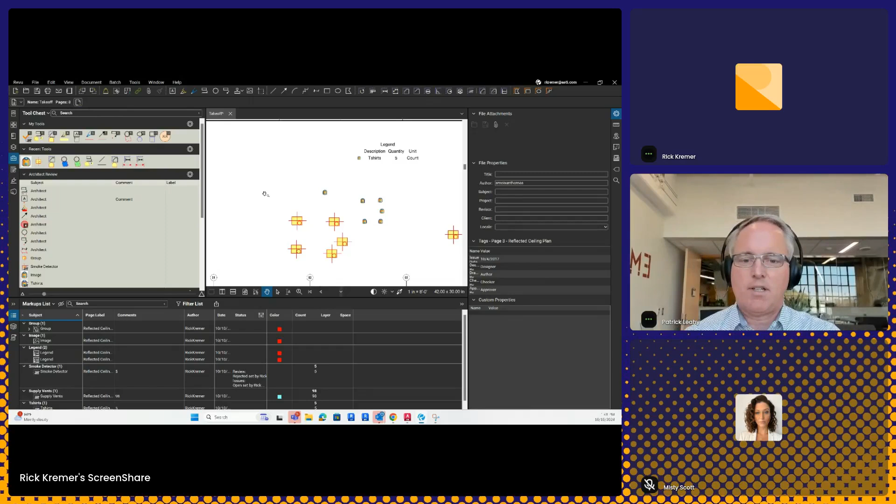You know what, I would have to see that, Patrick. Tell you what, I sent an email to info@asti.com already. Yeah, I just thought I'd ask it. Yeah, I'd have to have my hands on it. Do me a favor, send the PDF as well. Let me take a look at it and then try to get back to you. I'm going to be limited on time, I'll be honest with you. Tomorrow's kind of like the last day before heading out to AU, and I'll be gone for the entire week.

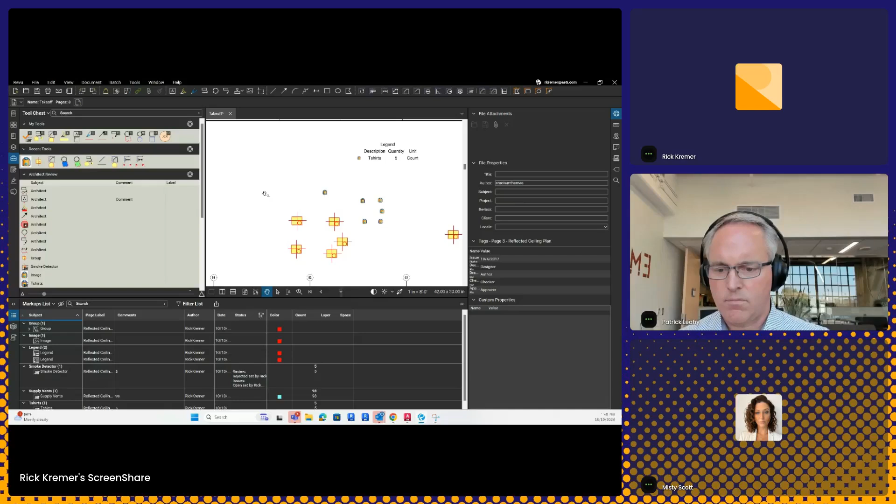So if you do, folks, send out. Patrick, thank you so much, by the way, for getting off mic and showing your face. I really appreciate it. But usually I turn around pretty quickly with these answers. If there's a way to do it, I will find out how to do it, or find someone to help us figure these things out. I love pushing Revu to the max and looking for items. A lot of times, so Patrick, you mentioned about rooms. One of the things that I really like doing, if you're coming, question for Patrick, are you using Revit?

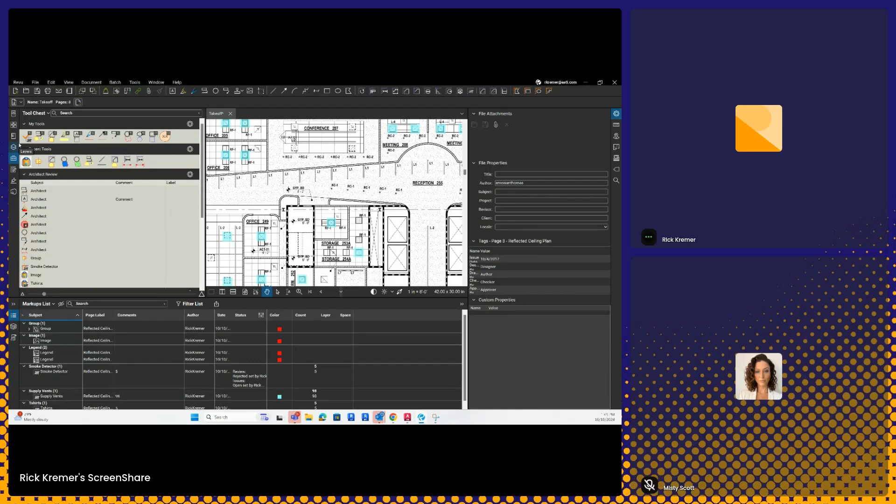If you are using Revit, you can incorporate spaces. In Revit, you create rooms, and rooms keep track of all your schedules. If you use the Bluebeam plugin in Revit, you can export out spaces. And it's like, what the heck are spaces?

I'm going to go over here and turn on spaces. Spaces come in automatically from Revit if you use the Bluebeam Revu add-in. What's cool about this is, let's say this doesn't have spaces, but I can tag it, I can create a space. I'm going to add a space, and over here this is a particular space. I'm going to call this stair number 1.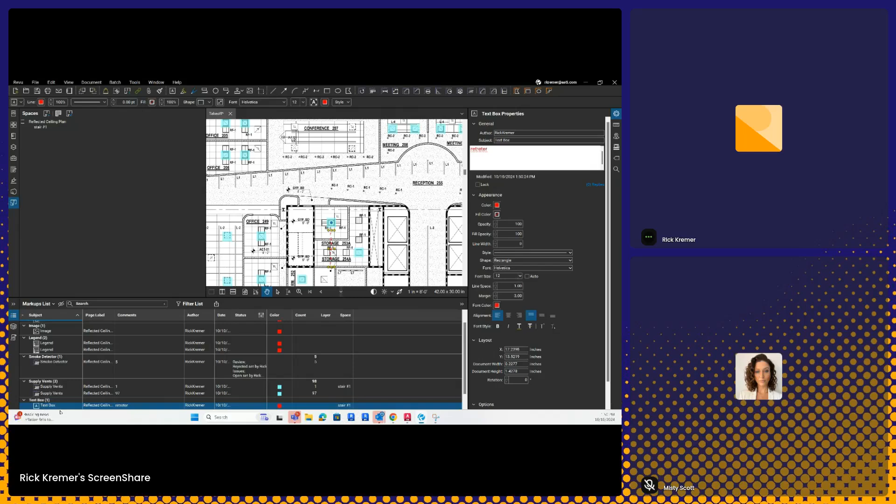With this information, I'm going to turn on spaces, highlight the space right here. When I place a markup on top of that, whatever it is, it comes in with that space. So now all my associated markups placed inside this area, any markup can now be tagged to that space, and I can start to organize all my markups per space.

Here's a perfect example. I do a lot of walkthroughs. If I have spaces, as I start my punch list walkthrough on an architectural job, all associated issues with one space can be categorized by clicking here, and now I can see all the things associated with that space.

Michael says it might be easier to assign the room rectangles on their own Bluebeam layers to grab the markups list to create a count legend. Yeah, I'm not sure where you're talking about on that one, but grab the markups list, agreed. Another option is to create custom sketch to scale tools.

Yep, yep. Oh, this is great dialogue, folks. Yeah, this is perfect. What other things?

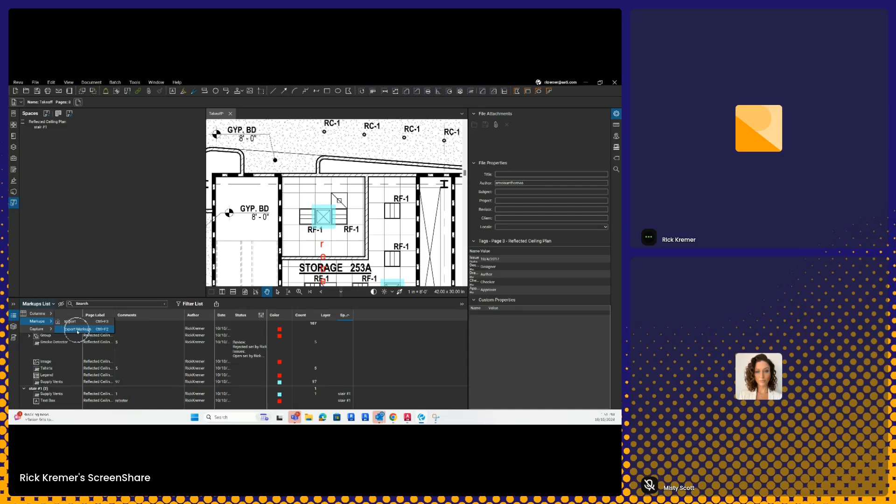Alex asked earlier, how do you copy markups to an updated design drawing? Over here, I go to my markups list, go to markups, export markups. This is going to create a BAX file. I'm going to save that theoretically on another drawing. Watch this, I'm going to go over here and export markups again, and put it in my downloads. Let's say for argument's sake, this is my updated drawing with 0 markups.

How do I import them? I go back to the markups list, go to markups, and import those markups right there. And now they're back here in my project. So this is great, especially if you have an updated set of drawings.

So who asked that question? Alex. 5 points for Alex. Yeah, so you can get that. All right, let's see what new questions we have.

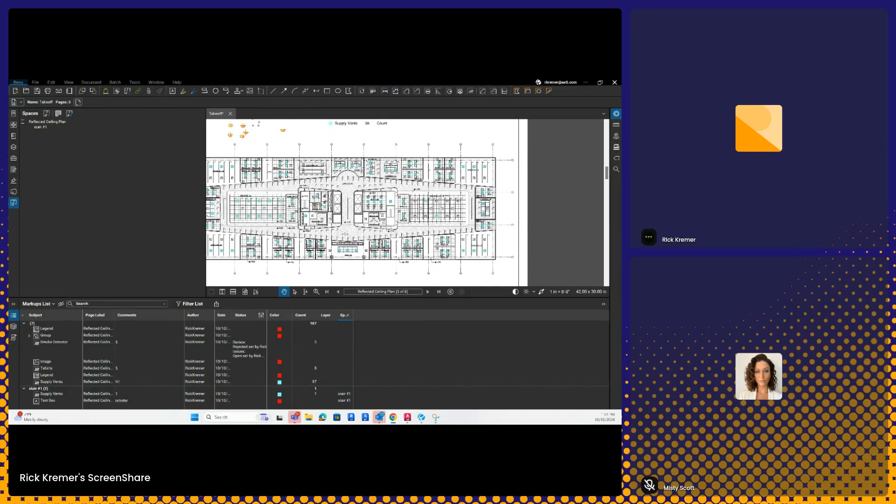After you do the count, how do you get the legend up there? I don't follow you. This question was from 6Chen: after you do the count, how do you get the legend up there? So select one of your markups and right click on it.

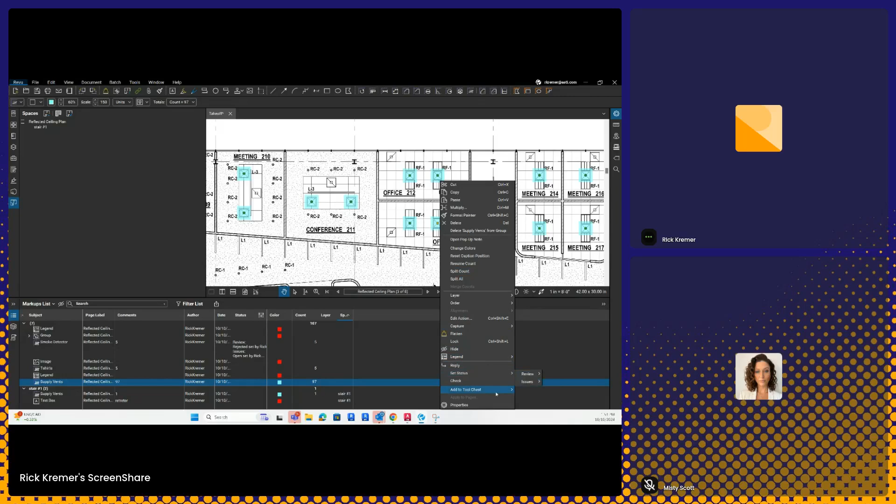One of the options down below is to create a legend. If you have an existing legend you've created, you'll see it's already labeled, generically called legend. You can update it. So if I have more things I'm counting, I can update it to that legend. I'm going to go to legend and create a new legend, and there it is right there.

But now let's say I'm doing a different type of legend. I'm starting to count something else. I'm going to measure over here, count, and I'm counting these objects. I'm going to call these RC2s. How many RC2s do I have? 3 currently.

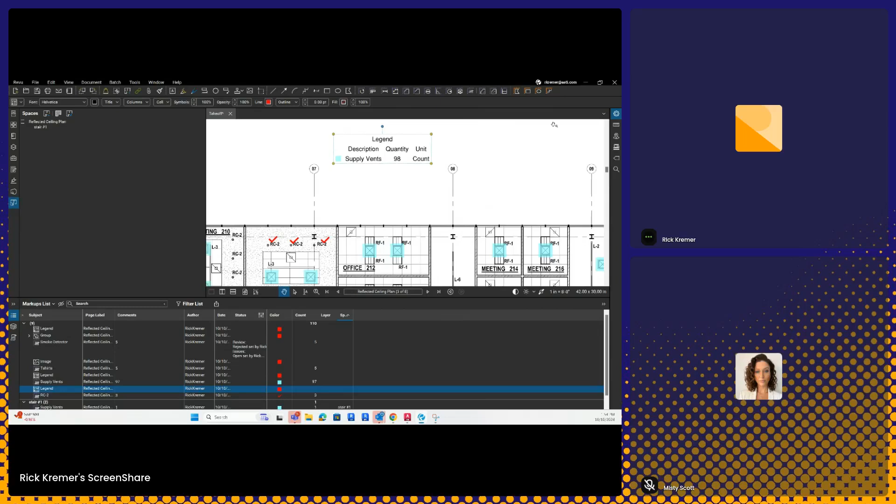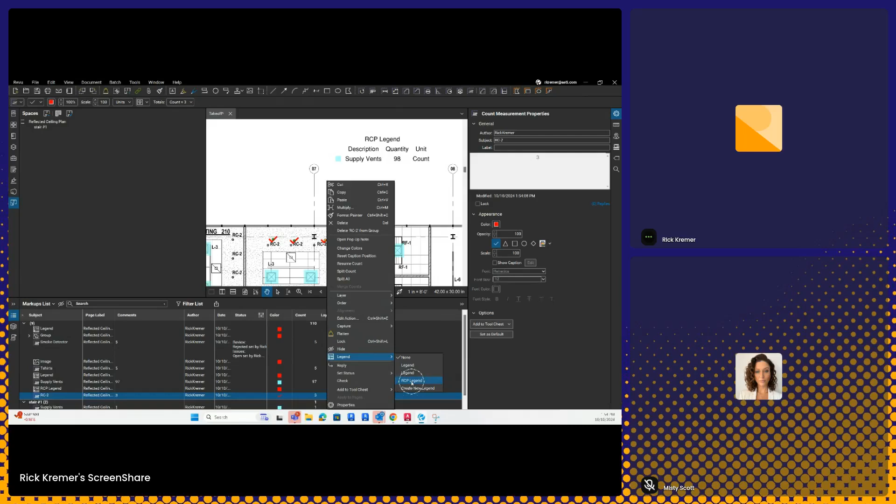I haven't done the count, but I want to include it in this legend. I'm going to come over here, select this, and first of all give it a unique name. I'm going to call this RCP legend. Let's try it again, RCP legend, give it a unique name. And I want to include this in this legend here. I'm going to select it, right click, go to legend, and now include it in the RCP legend, and it adds it to that existing legend. You can keep doing that over and over again.

Nate mentions batch slip sheet for updating a new drawing revision. Yes.

So we're not going to have time for those 5 minutes, but yes, let's talk about batch slip sheet. Let me walk you through what that would look like. If I have an original set of drawings, Bluebeam has the ability to go through and update a new set of drawings by doing what's called batch slip sheet.

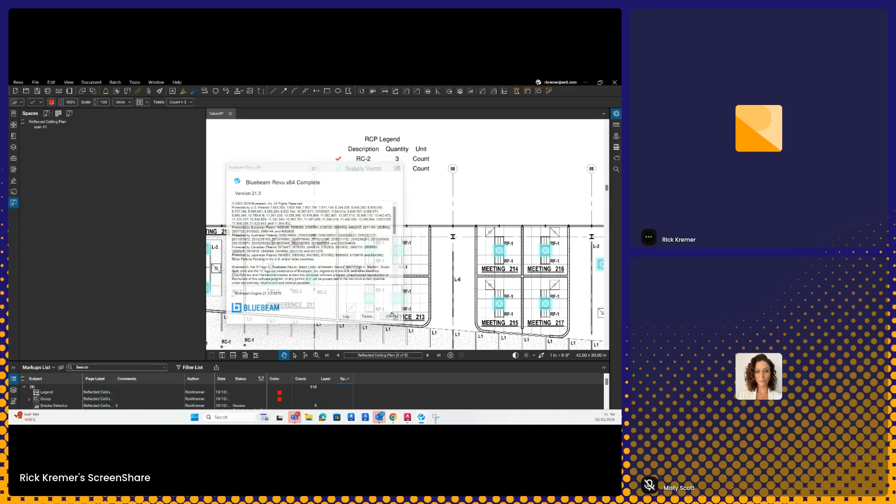Now, this batch slip sheet feature is available in the complete version. I don't think it's in the core version. Bluebeam is sold in 3 different editions or versions. To see what version you have, go to Revu and About, and you'll see that if you're in Revu 21, it'll say Basics, Core, or Complete.

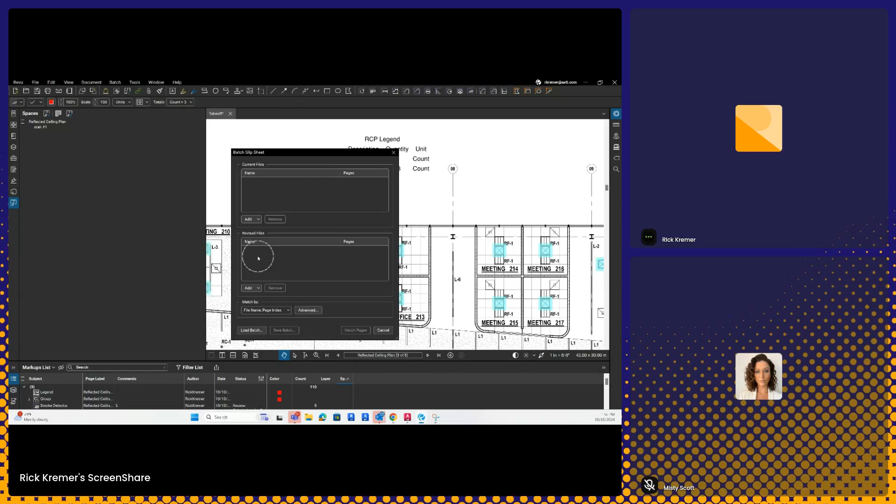Complete has the batch features that allow me to do batch slip sheet. The whole idea is that when I do a batch slip sheet, I locate my original files and my revised files, and then it'll give me an option to either get rid of the old sheet or keep the new sheet on top with the old sheet underneath, marked as superseded. It'll take the markups automatically and move them up to the revised file. This is a really cool feature, under batch slip sheet.

By the way, if you want to learn more about any of these tools, a great resource is Bluebeam University. It's complementary to your learning and included in your Bluebeam subscription. So check it out, and then you can look for batch slip sheet.

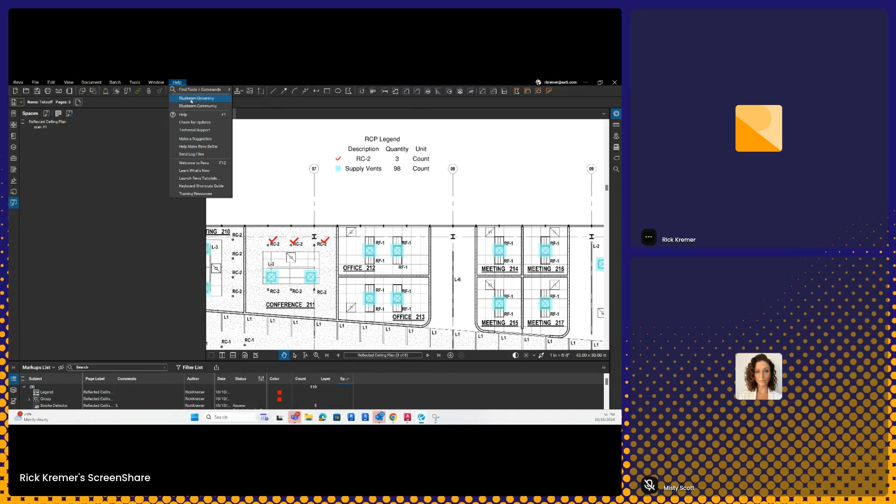So I'm going to just launch Bluebeam U. This doesn't replace my training, which, by the way, I do all the time for our customers. If you're interested in training, reach out to us and say you want some one-on-one training with Rick. I can provide that. If you want to do Bluebeam U, which is included, it's not live, but I can go over here to batch, and here's batch link, batch slip sheet. When I click that, this will take me right to a video on Bluebeam U on how to do batch slip sheet.

Again, this doesn't replace me. It just complements, it's an additional resource.

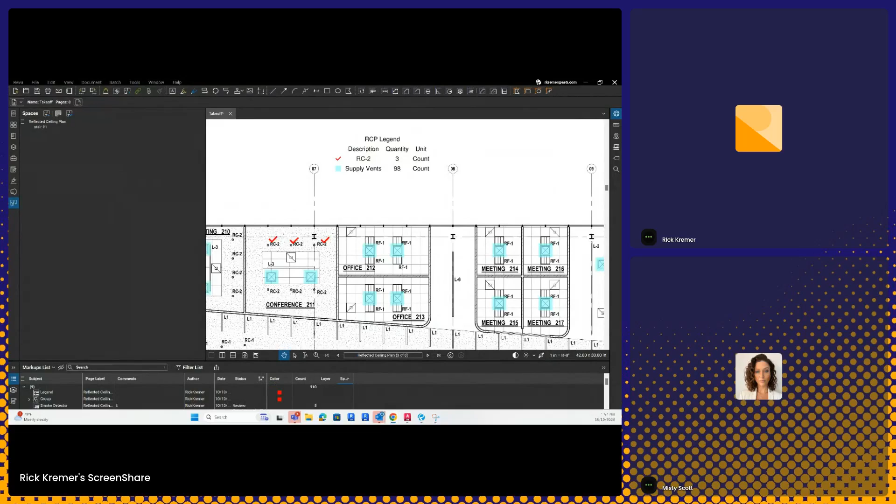Nothing can replace Rick. Oh, thank you. I love you guys. No, they've been amazing. Absolutely amazing. And you know what I said in the chat, Rick? I think we need to do a version 2 of this in a few months after things settle down and the holidays. Maybe do a second version of this open discussion because there's tons of really great questions and conversations going on.

Yes, last question real quick. Again, the email was rejected. Try info@asti.com. There it is again. Try sending an email, Patrick, without an attachment. Maybe that might be it. If it's over 5 meg, it shouldn't be rejected.